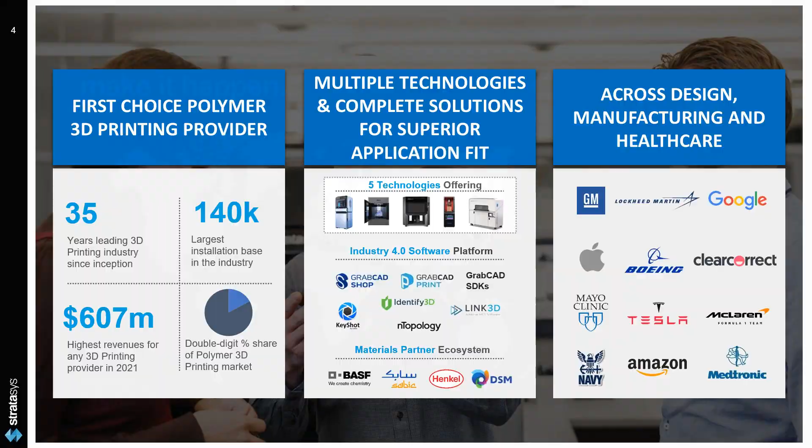Let's move on to understand a little bit more about Stratasys, headquartered in Minnesota, Eden Prairie, USA, and Rehovot, Israel.

Here's a video for you all on Stratasys.

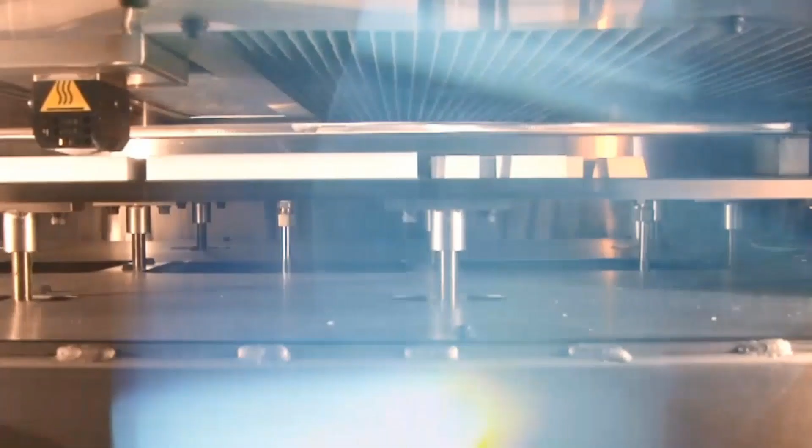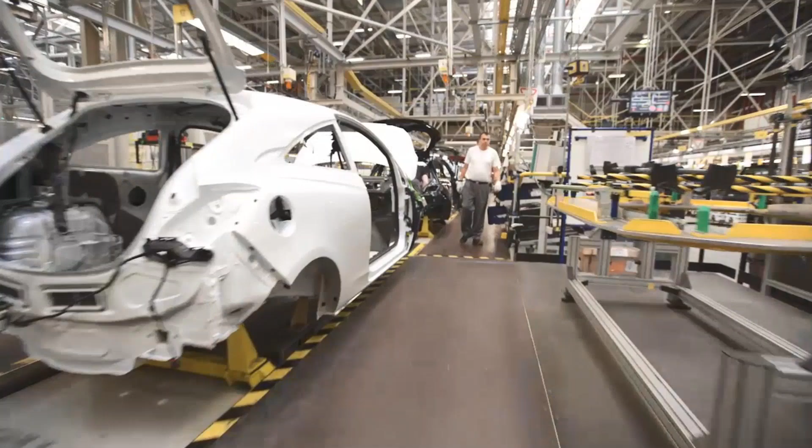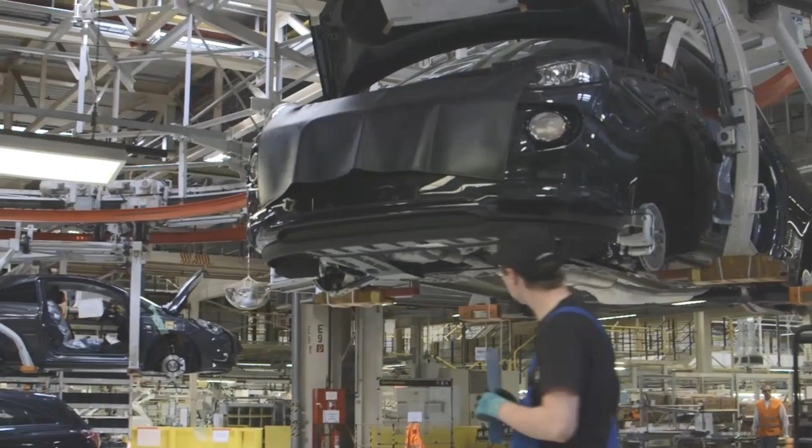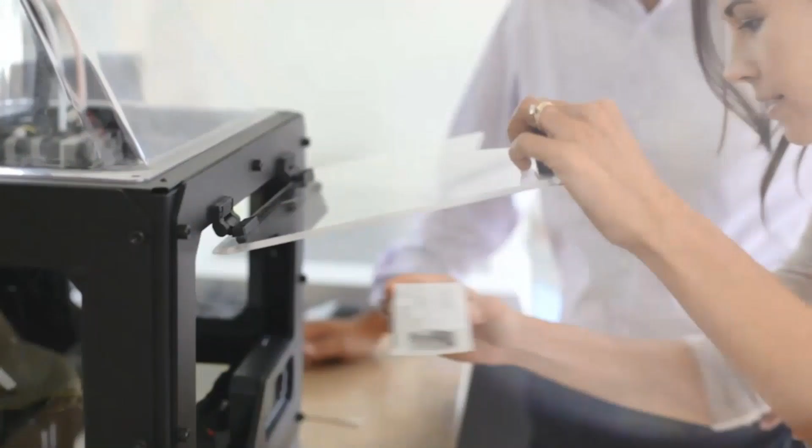Stratasys is shaping the world around us. From 3D printed rapid prototypes and design freedom, to manufacturing innovation and production-ready solutions, we believe that what starts with a spark of an idea can now become reality. We see opportunities all around. The products, solutions, and services being developed within our walls today are changing the way things will be imagined, designed, and made tomorrow. Stratasys 3D printing solutions allow us to tap into the unlimited imagination and potential within each of us, helping designers, engineers, and manufacturers transform their capabilities and accelerate progress across virtually every industry. Stratasys is shaping young hearts, planes with purpose, helping explore the next frontier, accelerating progress, manufacturing earth-friendly efficient designs, and delivering power and energy to the world. Stratasys empowers the dreamers to dream, inventors to invent, doctors to heal, and industry to grow. We are shaping innovation, creativity, discovery, education, imagination, and the possibilities of tomorrow. Stratasys, the 3D printing solutions company.

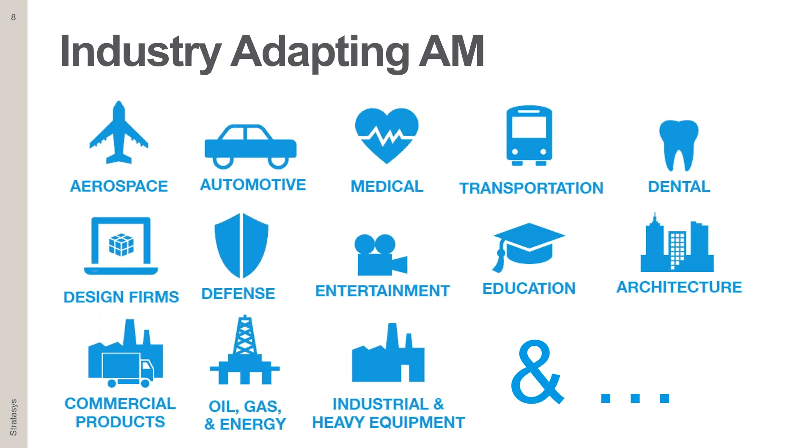So, well, it's been truly impressive on Stratasys. Let's now focus on which industry verticals are adapting additive manufacturing. There are unlimited possibilities today, with industries ranging from aerospace, education, medical, automotive, dental, architecture, and many more. For any designer in any given vertical, the use of 3D printing enhances their workflow.

Now here comes the best-in-class polymer-based 3D printing technologies from Stratasys. There are 5 leading additive technology platforms that Stratasys offers today. Very briefly, PolyJet is a multi-material resin-based system, coming in various sizes with no limitation today. What you conceive, you can achieve, with endless possibilities for high fidelity modeling.

We have stereolithography, best in class, supporting quite a lot of large scale manufacturing as well. Then the focus is going to be on industrial FDM. Before that, the Origin P3 is a mass production based system, a DLP, digital light processing system, which uses liquid resin as a raw material. SAF stands for selective absorption fusion. Finally, on the far right, powder bed fusion technology, again a production based system that gives cost effective parts for short limited runs of production using SAF as a technology.

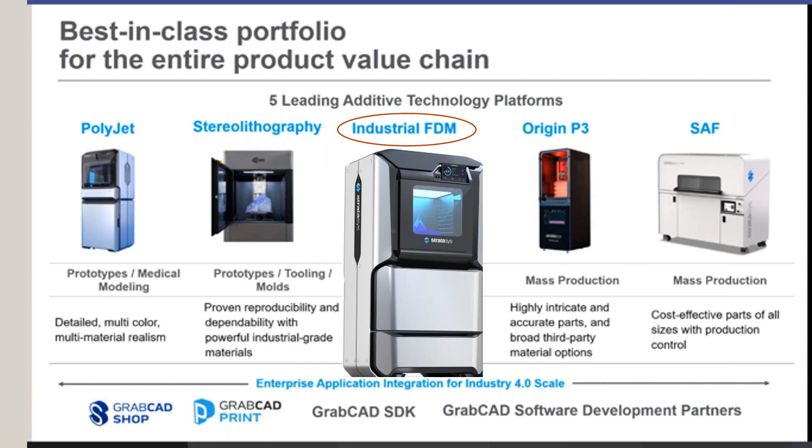So today the focus on industrial FDM is going to be on the Stratasys F series printer, which offers best in class accuracies and high strength. There are multiple polymers on a single office-shared system today that Stratasys offers on their FDM technology. Durability is a key factor with 3D printed parts, and more importantly, the most low-cost polymer-based 3D printing technology is fused deposition modeling from Stratasys.

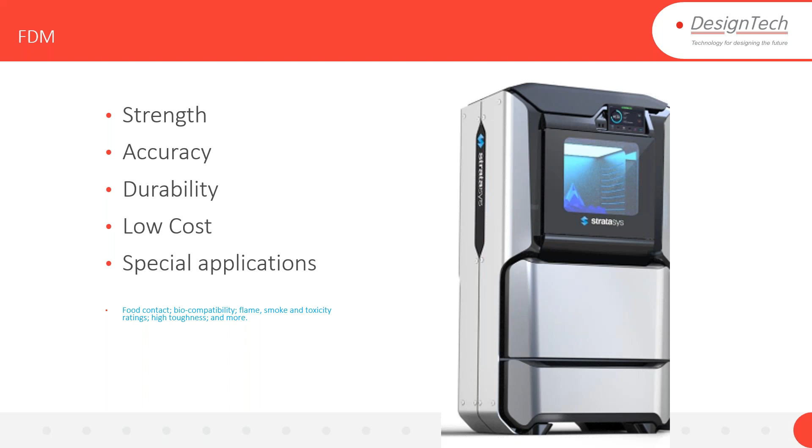While we focus on specialty applications, yes, there are materials with FST certifications, biocompatibility, food contact, for medical applications exclusive to medical industries - a whole wide array of materials that encompasses stringent manufacturing needs for multiple industry verticals. That's what today FDM stands for.

So FDM technology, let's take a look at the schematic here. Well, before the schematic, this is the largest system, which is a workhorse, the Fortus 900 MC. Then we have the Fortus 400 MC and the F series printers.

So this is a snapshot, an overview in terms of how the product looks. They are workhorses, meaning 24/7 uninterrupted power supply. They can keep going with sufficient materials to print and churn out parts.

So the schematic here, we are going to look at what you design. Today, native CAD files can be read by the interface software that processes them. Once you submit to the printer, you have the 3D printed part, with model as well as support material. Predominantly, on most materials, we have soluble support, which is truly a game changer when it comes to Stratasys leading the market in additive manufacturing.

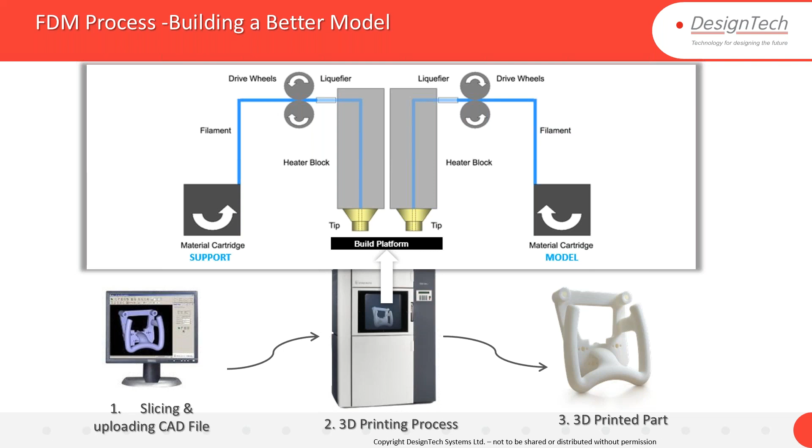Support material and model material in filament form are contained in cartridges that are driven by drive wheels into a liquefier zone, through which the material in a semi-molten state gets extruded in a heat envelope vacuum chamber containing the part that needs to be printed. The heat and vacuum enhance holding the build sheet and the part together on the platform, giving you parts that are highly reliable and can meet more demanding manufacturing applications.

Now quickly focusing on the subject line, Stratasys F123 series. These are affordable systems with multiple materials. They're user-friendly, and more importantly, with advanced capabilities, the trend of working with FDM takes on a new dimension altogether with what Stratasys offers. Also, we are going to look at the carbon reinforced series, the F123 CR series.

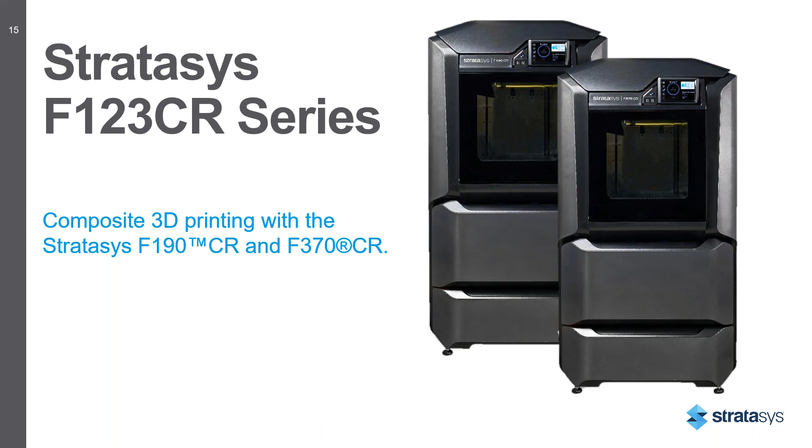With composite 3D printing, manufacturing is made much simpler today with a single step solution using Stratasys CR series printers.

Now let's go back to take a look at what has been conceived, designed, and manufactured. The old way in subtractive process is time consuming. But today, with the enhancement of material availability, the best-in-class systems from Stratasys give us the new way. With a single push of a button, you have the most complex and challenging parts that you can print. That's exactly what we talk about, and why do we emphasize this?

The reason is industries and businesses have a choice to make. Once you make a choice, you need to act upon reason. You don't have to lose your opportunities. You have to be very quick because there are competitors all around in every given industry vertical. So let's all win together.

So let's look at the factor of reliability, the economics with which today investments on an FDM printer can happen for the F series, and an intelligent 3D printer for the entire office. That's exactly where the focus is going to be, very well supported by GrabCAD. Today we have GrabCAD as software that supports reading your native CAD data and processes the files for printing. That's been the Stratasys intelligence.

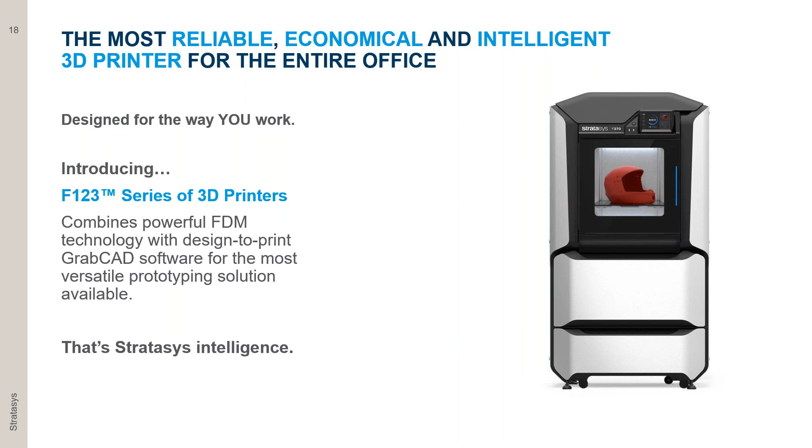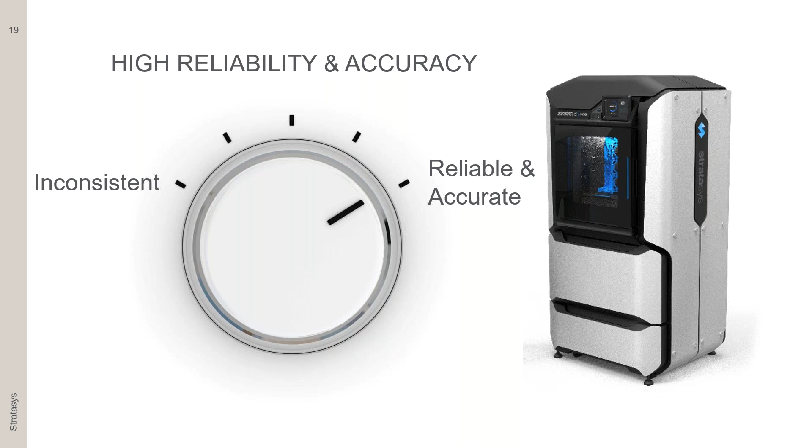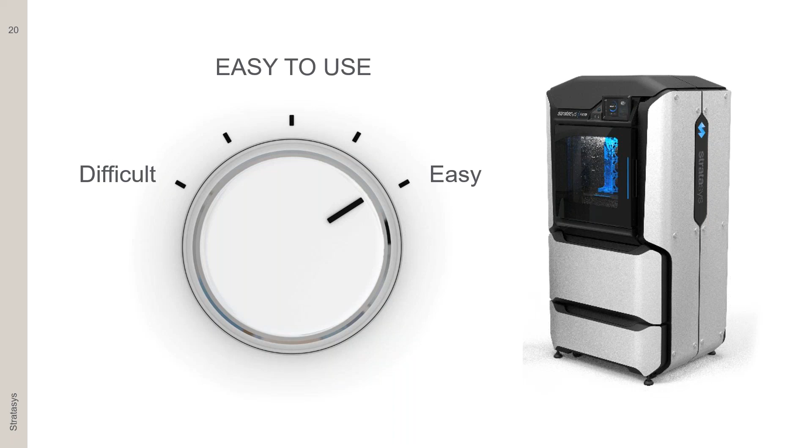So high reliability - what is the focus with the F series for high reliability and accuracy? When you look at the reliability factor, there is no compromise when it comes to accuracy, reliability, and ease of use. Single step processing doesn't complicate things. You don't need high skill sets to manage and use these systems. And more importantly, while we look at the capabilities these systems offer, the price category today is very much affordable.

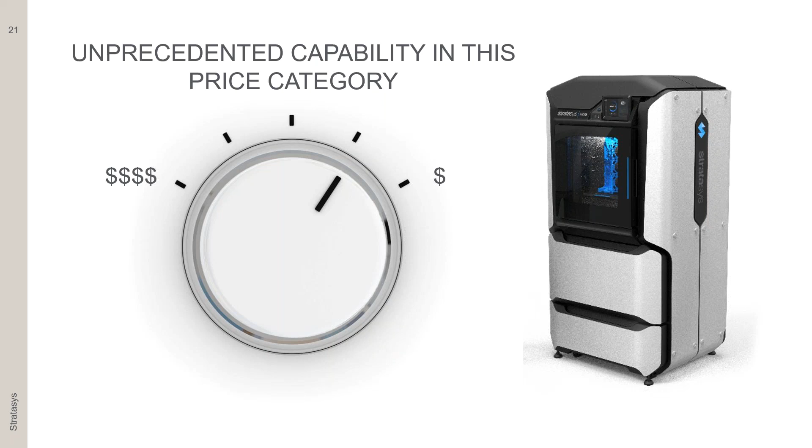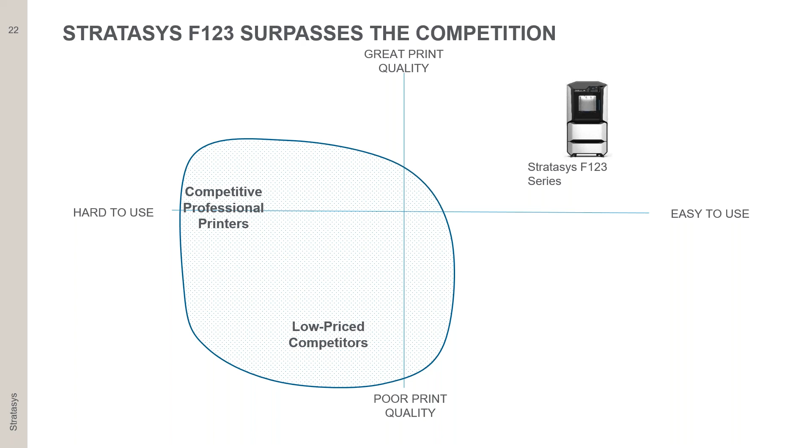F series printers, as I introduced, Stratasys has never stopped innovating. That's exactly where we see 15 new patents, and more importantly, 43 existing patents. The F123 series serves quite a lot of demanding applications, from prototyping to manufacturing.

Now we look at the F170 and F370, the two machines in the F series. While we talk about draft mode, it offers 2x the throughput. This is a great advantage when you look at two different modes of printing, the standard as well as the draft mode, and more importantly, the office shared systems.

These are just the first investments that any 3D printer user or concept designer would like to invest in. While we talk about the lowest investments that could happen with Stratasys quality, the best in class, with engineering grade materials along with the PLA option - cost-effective PLA options for initial concept realizations - all these are made possible only with the F series printers.

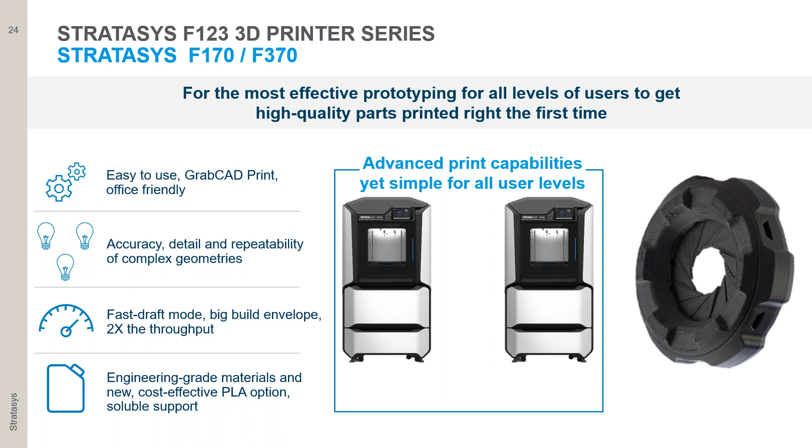So let's look at the portfolio of the F170 and the F370 that I mentioned. You begin with a 10 cubic inch platform, X, Y, and Z. And then there you see ABS, carbon fiber 10%, PLA, ASA, TPU, and then we have the QSR support, soluble support.

In GrabCAD Print, when you look at the Stratasys F370, you have 14 inches on the X, 10 on the Y, and 14 on the Z. Additional materials include Diran, and more importantly, PCABS and ABS in electrostatic dissipative grade.

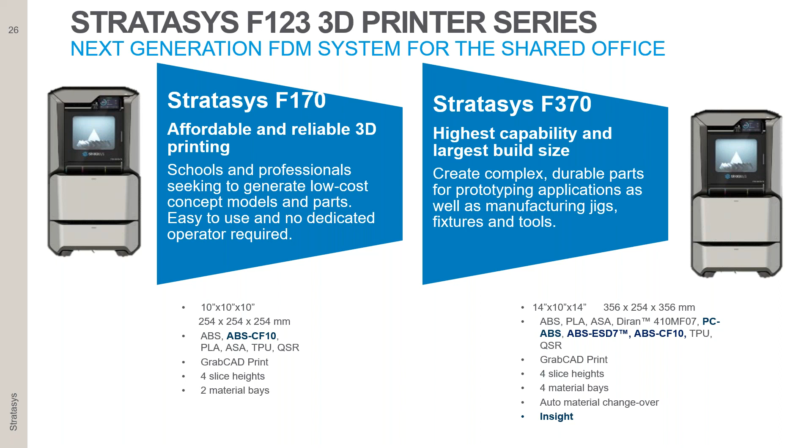A whole lot to talk about. More importantly, here is the solution: an intuitive interface, multiple material options, soluble support, and with the F370 onwards, you have the Insight software for more customizations during processing. All these can happen along with GrabCAD. Insight is a great tool for processing.

For remote monitoring of what the printer is doing when you have to run continuous long hour jobs, or when you need to remotely know what's going on with the printer, you can do mobile monitoring. Here's a quick video on the F series to give you an insight of how the printer looks and the quality you can experience.

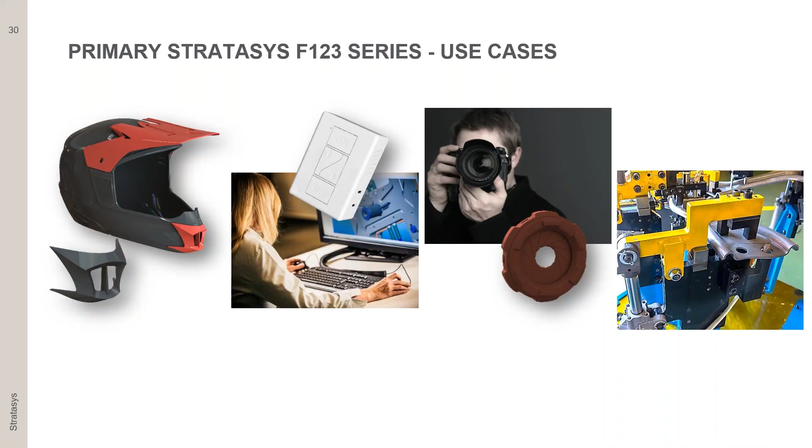So let's look at some critical use cases. While we drill down on some of these, concept verification, design validation, functional performance, as well as manufacturing tools such as jigs and fixtures, forming dies—all these are going to be covered in the use case section.

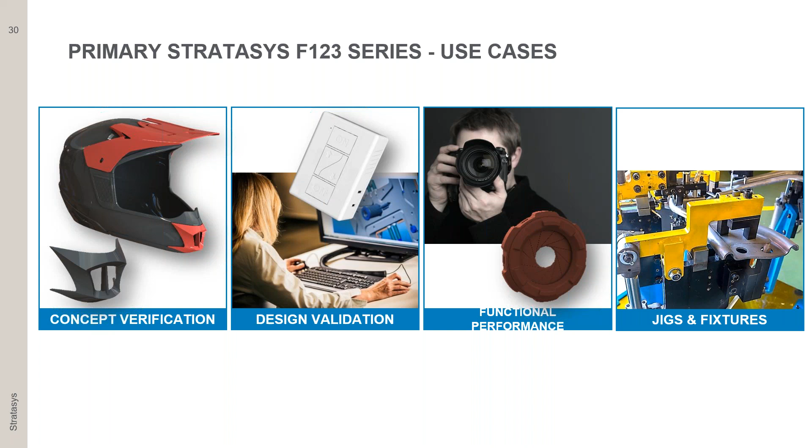So RedDOT, here's an organization that speeds production. How do they do it? For HVAC systems, they look at not just prototyping, but beyond prototyping—while they talk about functional prototypes, they get it first time right.

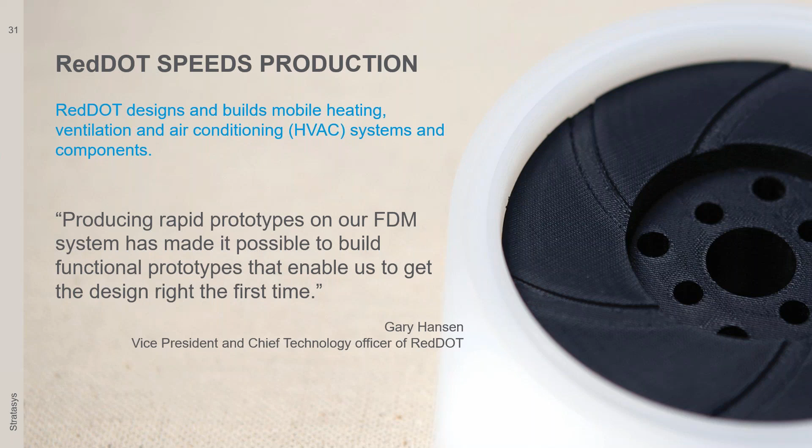That's more important. The VP talks about getting parts made on the FDM system that go on for functional testing, qualifying these parts and checking whether the designs are right the very first time itself. So first-time-right products are being made possible with the support of FDM technology.

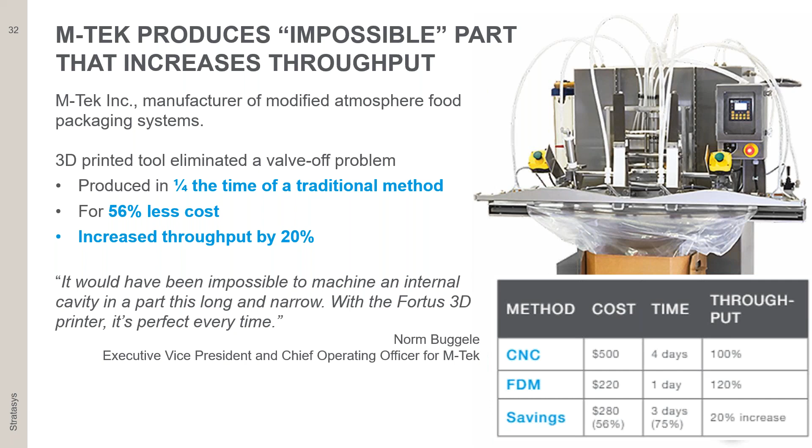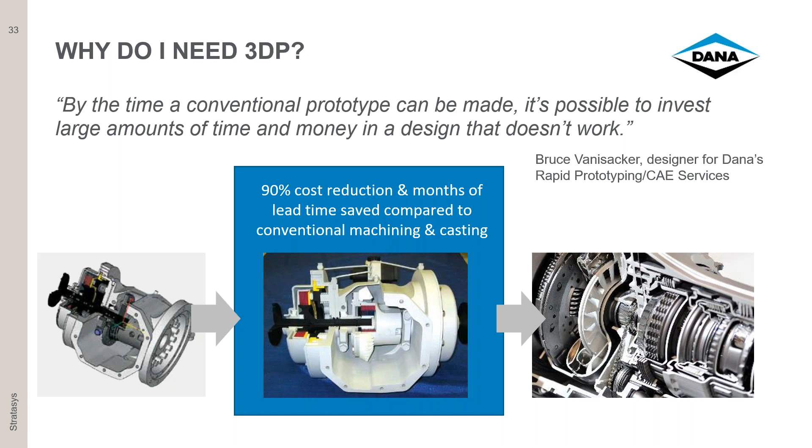Which means there's still going to be quite a lot of handwork and iterations in the traditional processes, because conventionally it's a multi-step process. And here they reiterate the fact that there's 90% cost reduction and months of lead time saved in making complex automotive assemblies. And that's exactly where the value is.

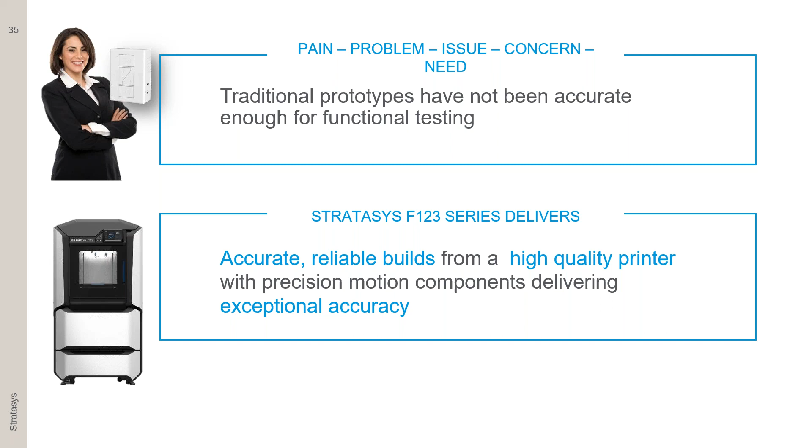But what Stratasys F123 delivers is accurate, reliable builds. And that is where the F123 series gives you exceptional accuracy and qualifies to be a high quality printer.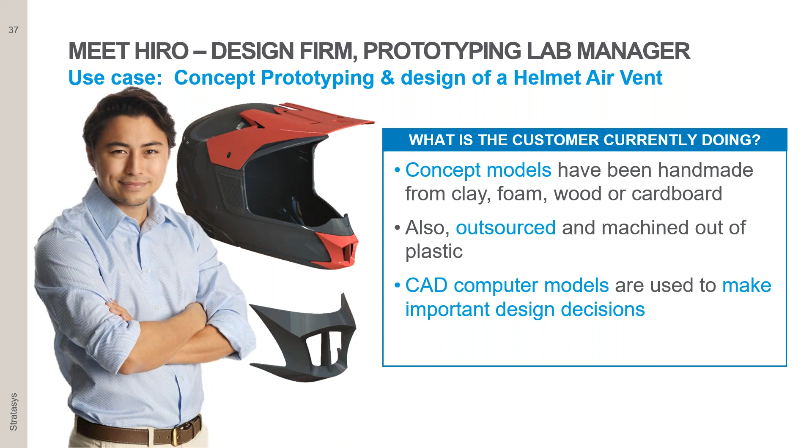Now, Hiro talks again from the design firm about being a lab manager, the challenges he faces. Either to make any concept model, they use foam, wood, cardboard, or even clay. Outsourcing is more challenging. Now, when they look at all these challenges, they have the F123 series, which gives them optimal as well as accurate printouts that serve their purpose in quick turnaround time.

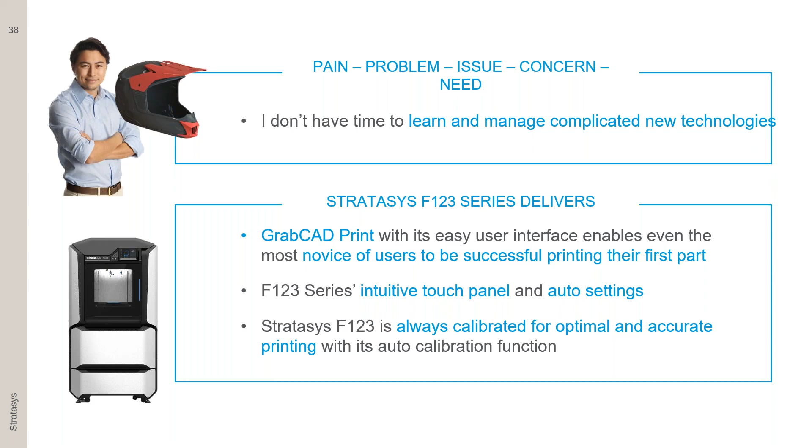Now, while we talk about accuracy and reliability, there are various aspects, various geometries which have been taken into account. Stratasys, well before introducing the F123 to the market, conducted all these tests. And more importantly, the F123 stands well within the accuracies of plus or minus 0.2 of a millimeter.

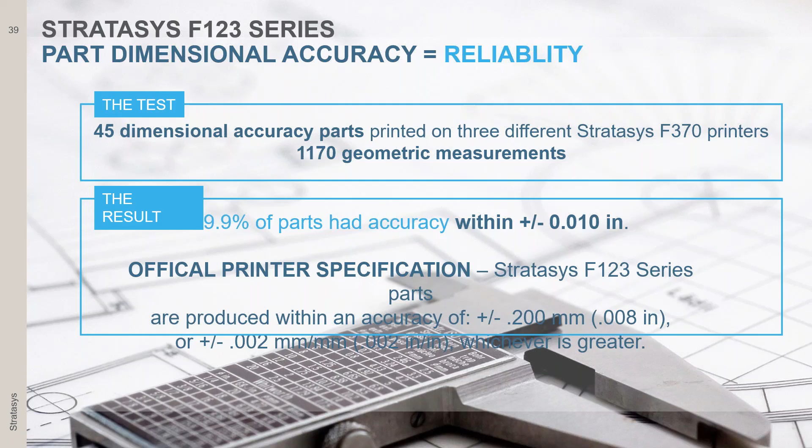While we talk about details, variety, and possibilities, yes, there are 4 slice heights.

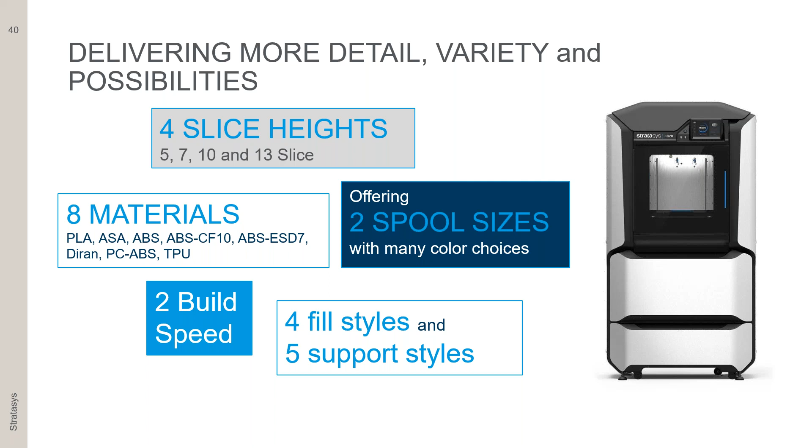While I talk about 4 slice heights, you have the standard slice height of 254 micron now, or 330 micron layer thickness, that is 0.01 of an inch or 0.254 of a millimeter. But we also have 0.127 or 0.178 layer thicknesses, which qualify to print small, accurate, intricate, detailed parts, and 8 material offerings. There are 2 spools with an auto changeover, and 2 build speeds, the draft mode and the standard mode. That has been on the standard F123 series printer with the engineering grade of material and the standard polymers with which you can print.

Remember, these are industrial grade materials that go with 3D printing technology of Stratasys FDM. Since these materials are manufactured and supported by Stratasys, they all fall under the industrial polymer grade, and they qualify to meet any stringent test. All the tests have been qualified with ASTM standards.

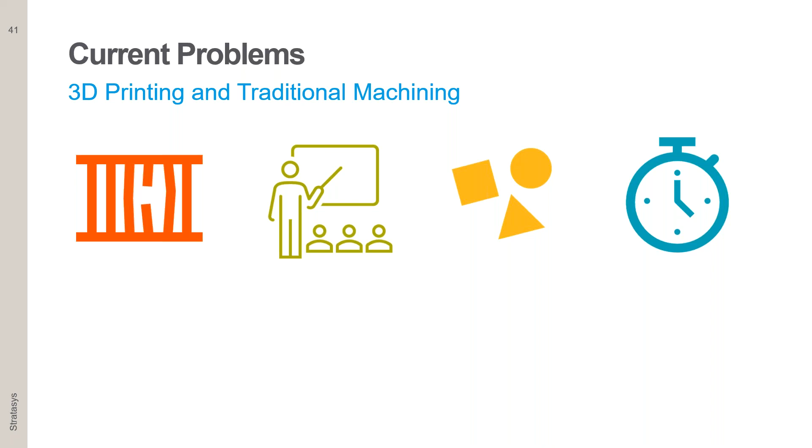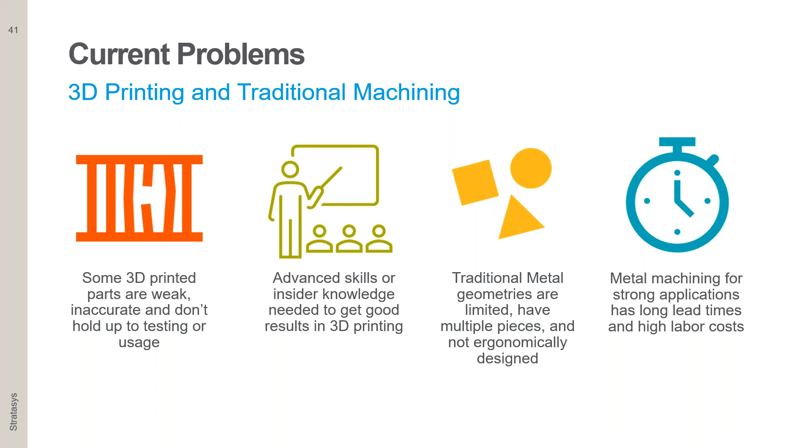Now let us take a look at industry current problems with 3D printing as well as with traditional machining. Other than the Stratasys product line, we have come across quite a lot in competition where 3D printed parts are weak, inaccurate, and more importantly, they don't hold up when functional testings are carried out. And when we talk about other challenges, there are plenty.

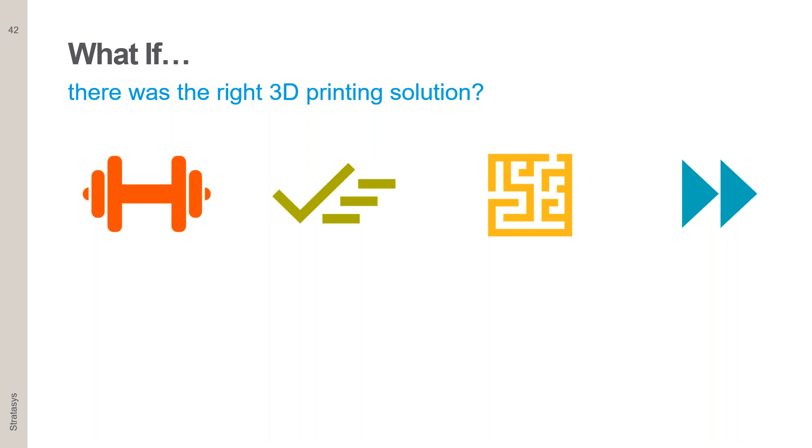Now let us look at what if you had the right 3D printing solution. Let us give a thought about why you should need the right 3D printing solution. Because you don't have to have any investments made and try to tinker around those investments or those printers and then be delayed in your project's execution or not qualifying your outputs to meet your customer needs. Now today you have a solution with high strength composite materials that could mean quite a lot in your manufacturing line.

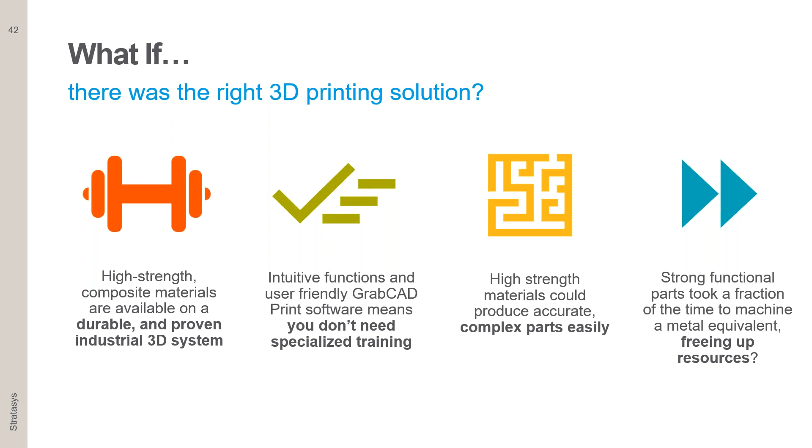And more importantly, when we talk about the software, the printer software, you don't need any specialized training. It's easy to use, and then you don't need any special trainings over there. And more importantly, the materials that qualify could meet most of these stringent manufacturing needs. That's exactly where complex parts are made much, much easier. And the functionality aspect is not compromised. You have more time so that you don't need parts to be finished or post-processed or done for manufacturing separately by machining, etc. Here you have highly accurate, repetitive parts that qualify to meet stringent manufacturing needs.

So here we are going to look at what is more critical here to stay within your budget when you're going to invest in an F-series printer. That could supplement your manufacturing. While we talk about manufacturing, tooling comes as foremost. So let us now address what are those toolings that qualify to be made possible with the FCR series printer.

While we talk about composite 3D printing, it's a quick turnaround today to match and meet most of the demanding custom manufactured tools that offer productivity. Here we are having 3D printed tools that without compromising on the part quality, you have production tooling that you can print. That's where we talk about producing strong, functional, lightweight parts. All these qualities make it a cost-effective and viable option for using F-Series CR.

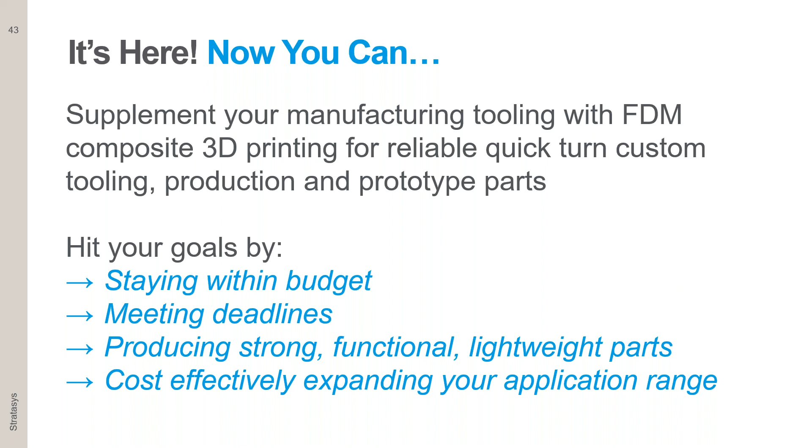So F190CR and F370CR are the two offerings that today's Stratasys are exclusively offering, because here you go with nylon CF10 materials. So parts that are stronger, stiffer, and more accurate.

While looking at fully hardened systems, these systems are hardened because you are using carbon reinforced material, which could actually create quite a lot of wear and tear through the tips and through the nozzles that allow these materials to pass through. Now, ideally, these are systems that have been fully hardened that could take up any strong carbon reinforced materials, and more importantly, keep delivering you the quality with an extended life. That's more important. A quick snapshot in terms of what the build sizes and the build volumes are.

On the F370, again, it matches the F370 standard with 14 by 10 by 14 inches. Here we talk about 14 inches on the X, 10 on the Y, and 14 inches on the Z, and a whole variety of materials. So you have the total materials in the spools, either 60 cubic inches or 90 cubic inches, and more importantly, FDM nylon CF10. Now, this is truly a game changer when demanding shop floor applications are needed. I'll be covering quite a lot of applications that meet stringent manufacturing needs in the coming slides.

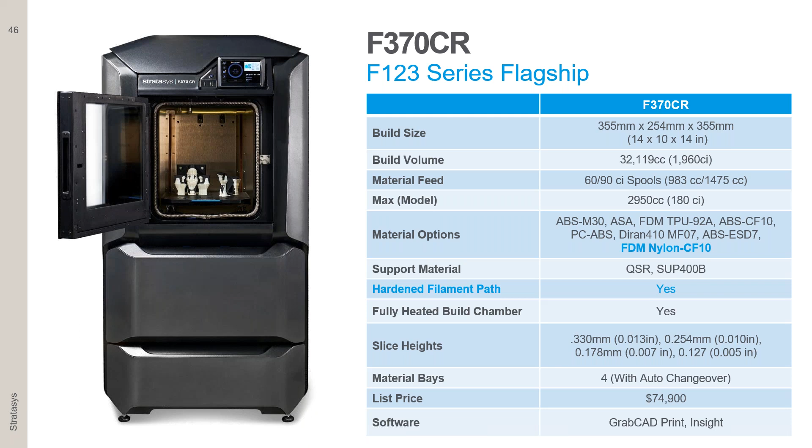So, well, before that, we also have the key attributes with which we talk about: ease of use, manufacturing floor ready, and more importantly, functional parts that are highly stronger. And it's a proven technology and a wide variety of engineering materials. Now, here again, you have 4 material bays with auto changeover for long unattended runs.

That's very unique. And while we talk about, more importantly, the Stratasys technology, the Insight software is for advanced tool path control. Which means the advanced tool path control gives you an edge and complements your customization while you're processing complex files. Now, GrabCAD Print does allow you to do quite a lot of customization, but more importantly, Insight is a far advanced software that comes along with F370 and above on the FDM portfolio of Stratasys.

With the F370, let us remember there are already 9 pre-tuned materials for immediate success, and more importantly, here is a platform which is ready for any additional materials that Stratasys may introduce in the coming days.

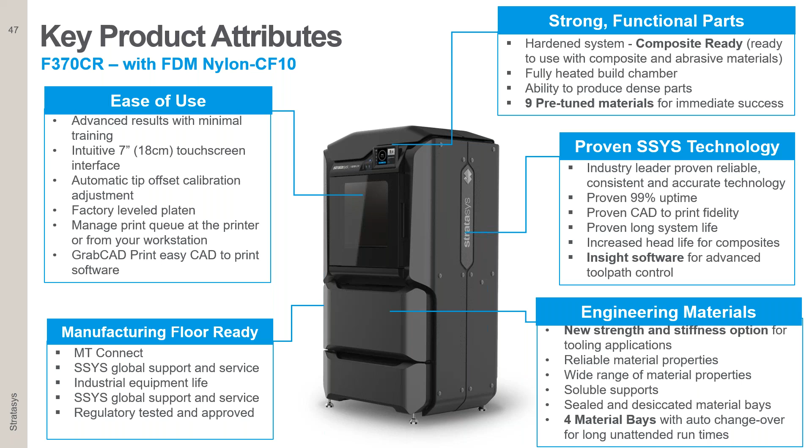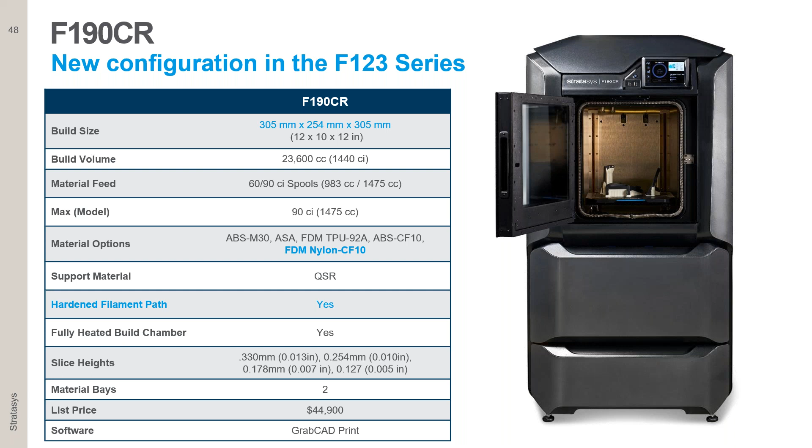Now, coming to the F190CR. It's a little larger than the F170, with 12 inches on the X, 10 on the Y, and 12 on the Z. Here again, with all the additions, we have the FDM Nylon CF10, which is a great game changer when it comes to manufacturing. With the same key product attributes, today there is no compromise as long as you intend to have a system that can print repetitive, high quality, stronger, stiffer outputs that are highly accurate.

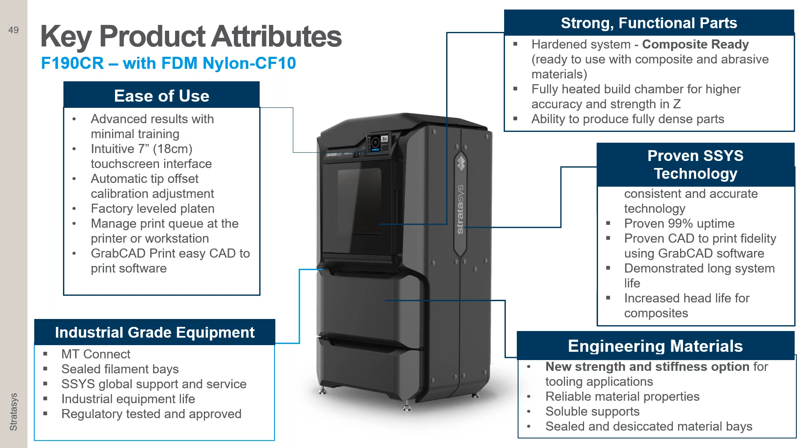Now let's quickly get to know more about the manufacturing readiness of these systems. Why does a system become so very durable? More importantly, it makes a quality statement in the additive industry. Stratasys has spent quite a lot of effort in having their products deliver the best performance in the additive world. For any given vertical, there is no compromise. That's exactly why you get to see more than 9,000 plus F-series printers already installed in the field.

When it comes to proving repetitiveness and dimensional accuracy, it's always 99% plus. Moreover, when we talk about the uptime of all these installed printers, what's crucial to understand is that it isn't something where you invest in a printer and then get into challenges working around it, correcting your systems, or worrying the system will stop mid-job. You need only very limited involvement in upkeeping these systems. These are workhorses, and their uptime has been qualified world over, showing how well they've been used by our customers without much downtime. That's exactly where it scores more than 99% plus.

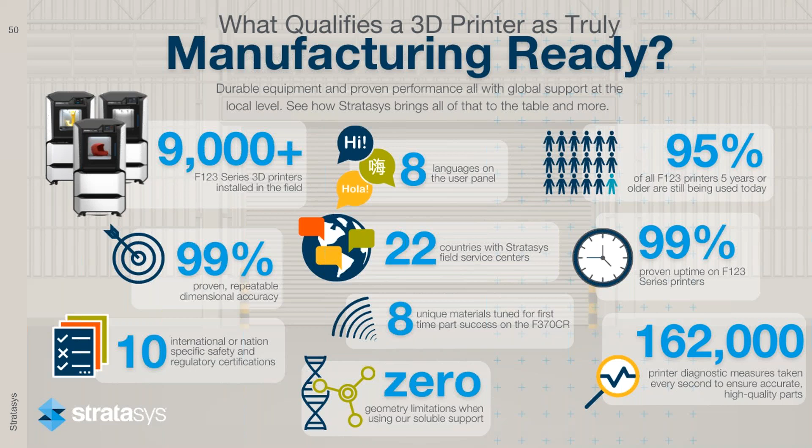Now, for all the investments that happen in 3D printing, there's also an aspect of safety which governs every investment. Safety comes first. Let us see how these F-series printers, with one of the best safety records in the industry, explain their safety aspects.

As it's an office-friendly system, it doesn't outgas. So the materials we use, whether that's ASA, CF10, Diran, TPU, and many others available on this machine, you can be sure that in an office environment you won't get the smell of chemicals coming out of the machine. It adheres to and is compliant with local standards for airworthiness within an office space.

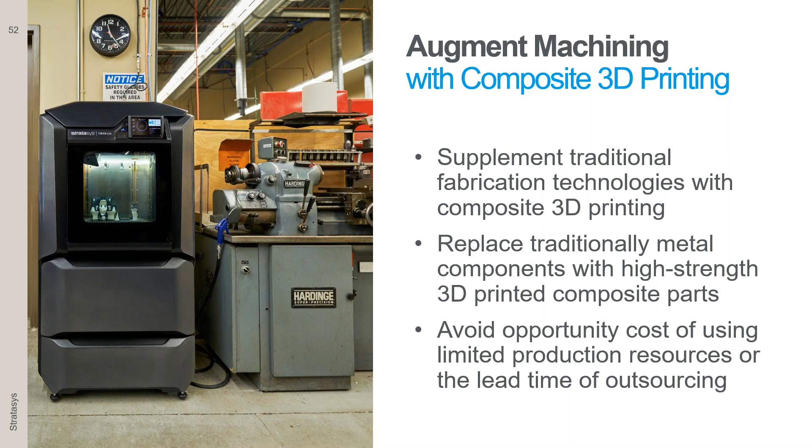Here you see strong composite materials with the F series CR machines that give them the edge to have quality outputs. These are work holding fixtures for CNC machining, so it's a complementing technology at the end of the day.

Again, let us look at additive as a technology that complements today's manufacturing. When you look at the complexity of curves, surfaces, and features involved in the work holding device or fixture, traditional manufacturing calls for multiple steps and more costs, because each given step of operation requires a program to be run, and you need CNC machines to cut your profiles, with different sets of tools called for various operations.

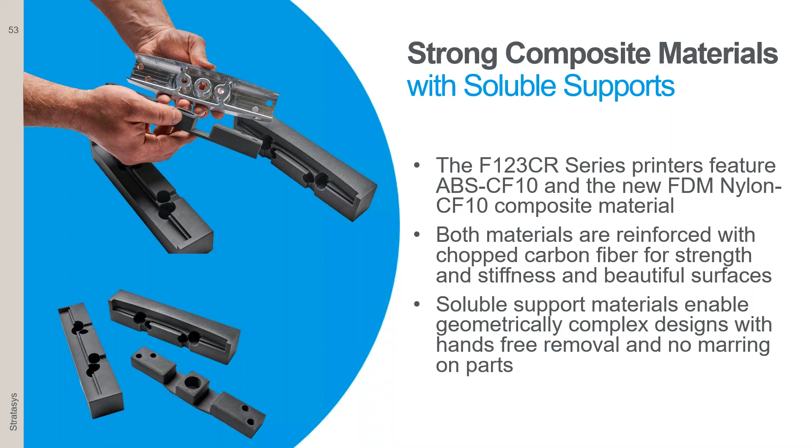But the major advantage with working with F-Series CR material is it gives you a single step output that covers all the features called for, whether complex curved surfaces, intricate features, or the most highly accurate holes needed in each fixture, all in a single go. So here we talk about replacing machined jigs and fixtures.

As I mentioned in the previous slide, you could see how the printing has happened for locating and machining an aluminum component. Machining fixtures, jigs, or jigs that let tools be driven through them, all these are getting manufactured with Stratasys CR F-Series printers.

More importantly, you can print them solid in nature with unlimited geometry freedom. That's important. You also have soluble support, meaning hands-free support removal with no challenges or time spent removing supports. And when it comes to chemical reactions on 3D printed parts, these materials are also very good for chemical resistivity.

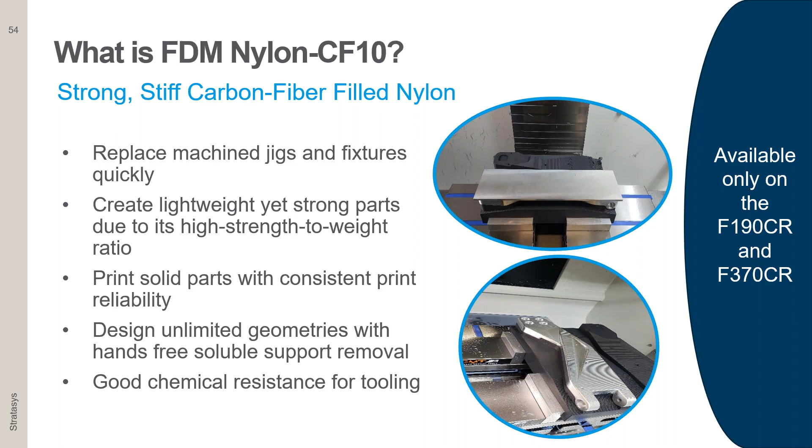Industrial equipment for manufacturing is very well supported with the CR printers. Ideally, what we get to see in heavy industry, transportation, or consumer products is there is no limitation. You can take it wherever you wish. What you print can actually be used in the manufacturing world of any given heavy industry, whether it is machinery, construction machinery, agriculture, automotive, or aerospace.

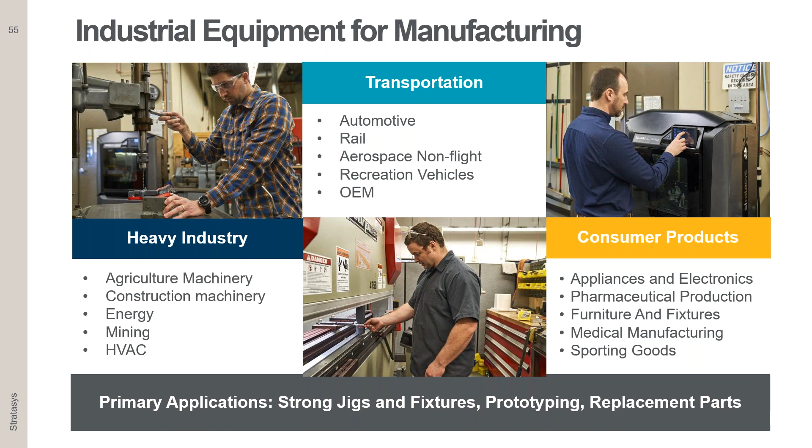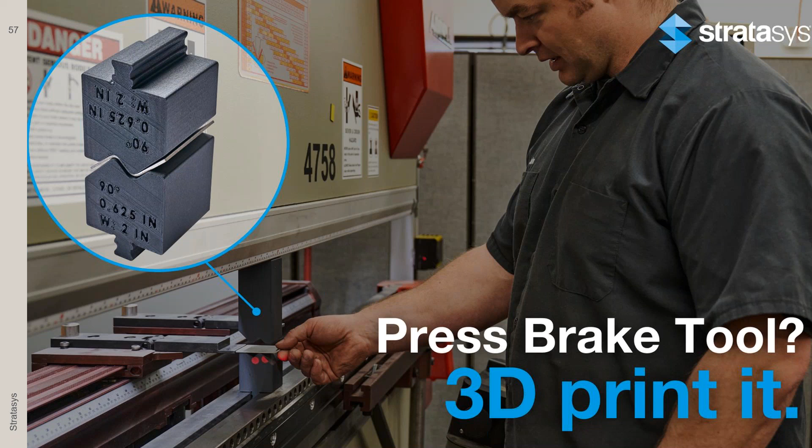And more exciting news here, we talk about a press brake tool. What do we mean here? A 3D printed CR material, carbon reinforced material with nylon, is used for forming metal, and that's exactly what is shown in this particular slide, a press brake tool.

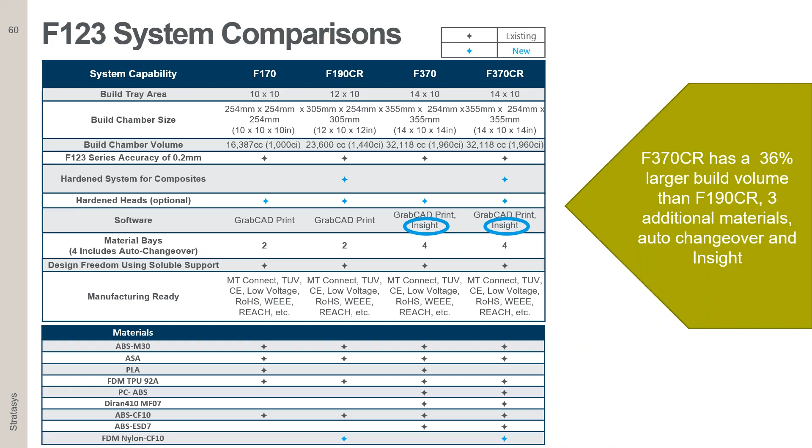Finally, let us look at some system comparisons between the F170 and the F190 CR. The most important aspect is the application needs. This slide talks about either using Insight as customized software along with the F370 and F370 CR, or working with F170 and F190 with GrabCAD. Secondly, 1,000 cubic inches on the F170, whereas a little larger in size for the F190. For the 370, the build envelope size remains the same, but with added materials, which is why today we look upon the 370 as a great game changer for making manufacturing tools.

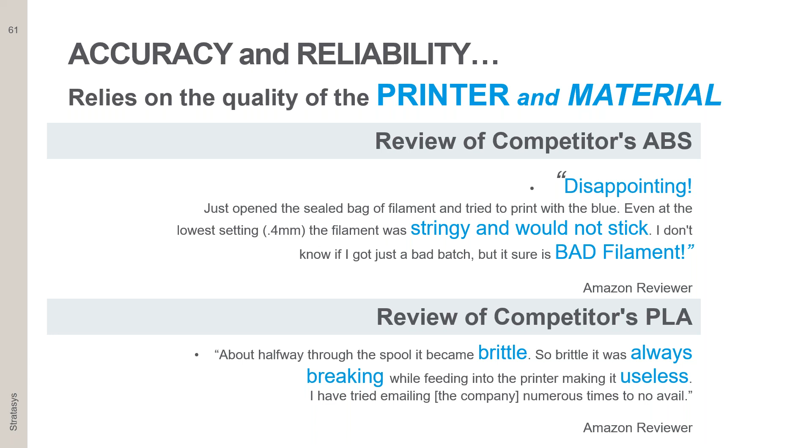Now let us focus briefly on accuracy and reliability. Quite a lot of people online purchase printers and use the term FDM, but unfortunately these are FFF printers, meaning fused filament fabrication, and they are disappointed to the core. The reason: build after build, including the filament in between, after a small percentage of use they tend to break, they are brittle, and all these challenges are encountered.

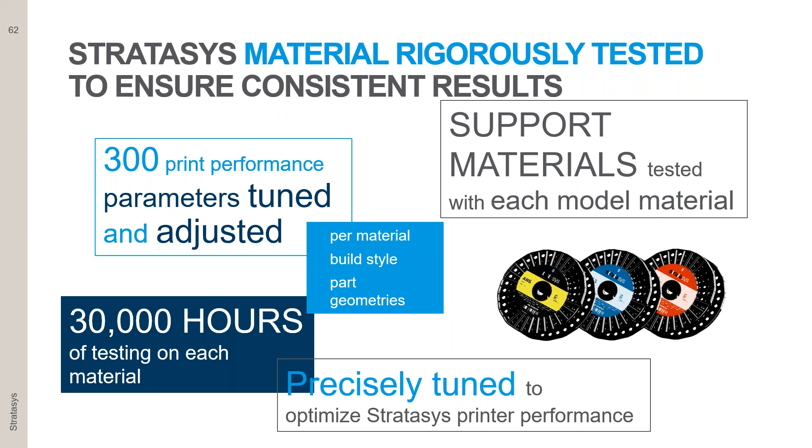But with Stratasys materials, what is more important is consistency in the results that you get. These have been tried and tested, and that's what this slide speaks about. Support materials are tested with each of the model materials, and more importantly, when you look at print performance, there are 300 print performance parameters which are tuned and adjusted, and you don't get all of these elsewhere.

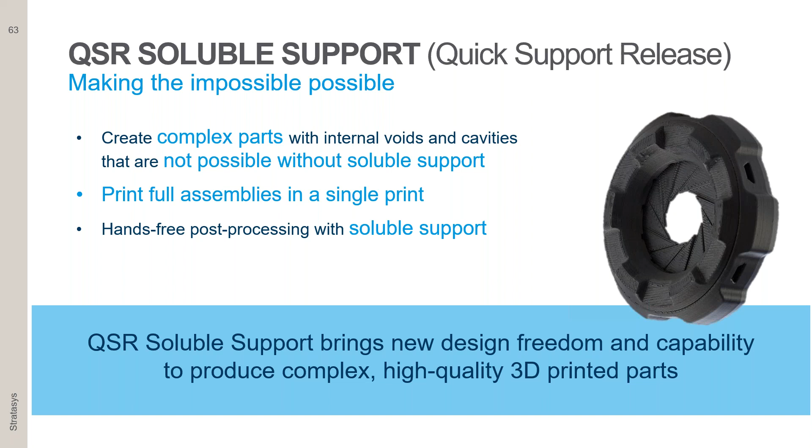So QSR support - what does this soluble support mean? It's a quick support release, making most complex geometries possible because you're using the QSR support. You can print full assemblies with hands-free post-processing. That is the design freedom you have, and the capability to build complex, high-quality parts.

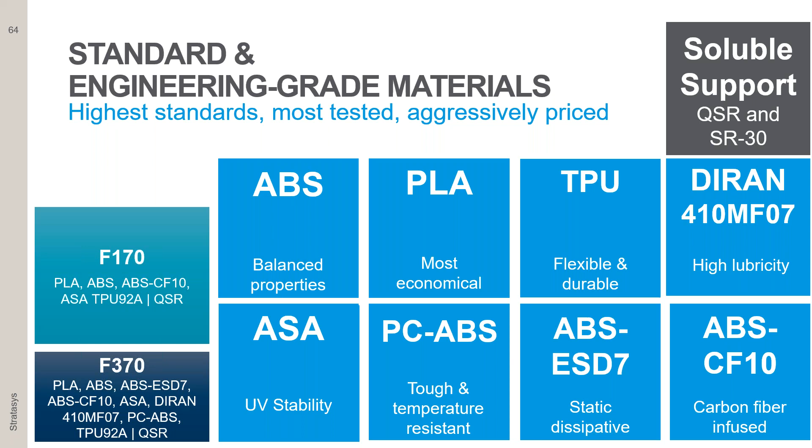So standard and engineering grade materials, a quick snapshot. The F170 and F370 have a wide variety of materials - more than 9 materials on the F370, plus ABS, PLA, TPU, Diran, and all these standard and engineering grade materials. More importantly, these have been tested and proven materials time and again, and industries enjoy working with Stratasys F-series printers with all these materials. And more importantly, these are very aggressively priced - we are not very high on the price lines, let us remember.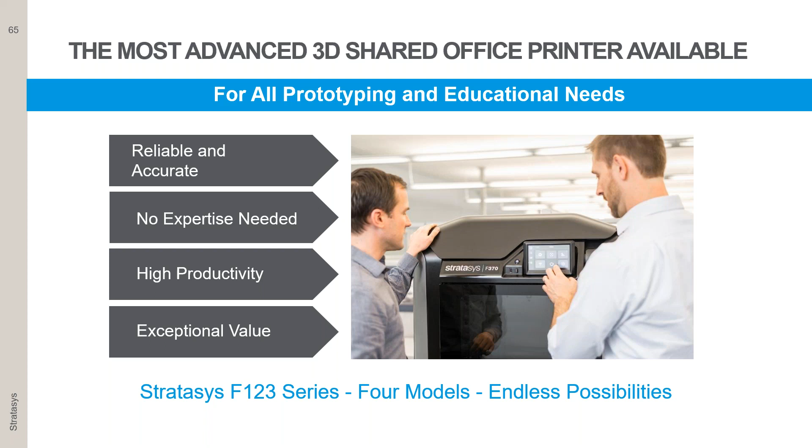So finally, for all prototyping and education needs, today we are looking at 4 models, endless possibilities, right? Reliability and accuracy - there is no compromise. And remember, no expertise is required to run these machines. These are simple, office-shared systems, we call them, with higher productivity and exceptional value.

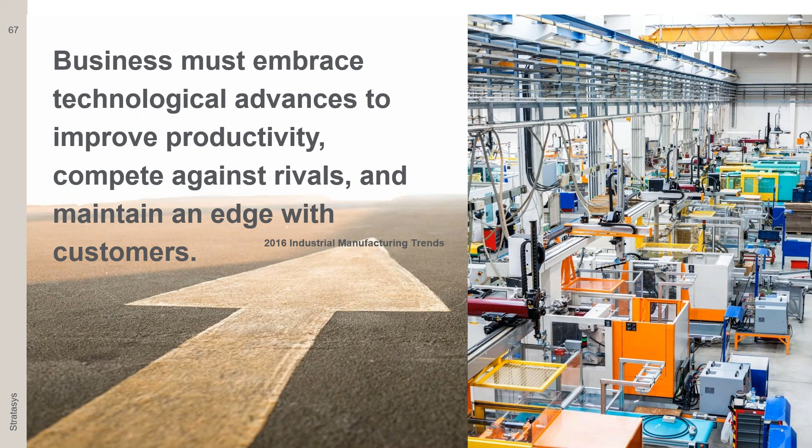So before we summarize, what is the common thread we are looking at? Any given business has to embrace technological advances, and today that's exactly what I would like to stress upon. When it comes to productivity or competition with rivals, you need to always maintain an edge, and that edge could come only if you embrace technological advancements.

So the 4th industrial revolution - whether it is globalization, commoditization, or the digital revolution that we summarize all about - the supply chain needs quite a lot of support. Today it becomes more simplified for the supply chain teams with 3D printing and the capabilities that the 3D printers offer from Stratasys, right?

Now comes the exciting time to give you all information about our most valuable large format printer, the F770, which is going to be launched.